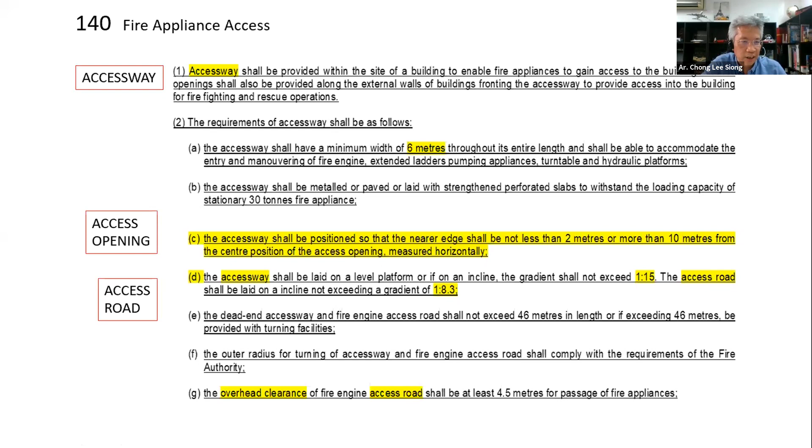So here, what we see is that in just this one new clause, we've got the definition of an access way, we've got the definition of an access road, and we've got the prescription of an access opening. It doesn't actually prescribe how you locate access openings, but it's given now the relationship between the accessway and the building, i.e., you require an access opening.

Yeah, what this clause actually says, the start over here, fronting the accessway, provided with the access opening shall be provided along external walls of the building fronting the accessway.

What this really means is that if you're designing a building with a fully fire rated wall on one side, say on one of the elevations, without any access openings whatsoever, it's a full fire rated wall, a solid wall, where there's no risk of fire burning out onto the exterior, and there's no way for people to even get inside. You don't actually need an accessway fronting that particular part of the building. This is really what it means, because it is meaningless to have an accessway fronting a blank wall.

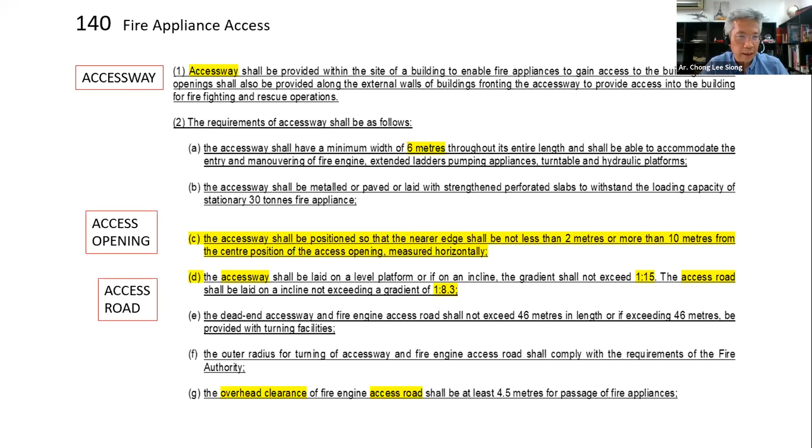Right, now we look at the other prescription then. Firefighting measures to fight fires for buildings over 18 meters high. Buildings in which the topmost floor is more than 18 meters above fire appliance access level shall be provided with the means of gaining access and firefighting from within the building, consisting of firefighting access lobbies, firefighting staircase, fire lifts, dry and wet rising systems.

Okay, we are all very familiar with this. This is really talking about the provision of firefighting access lobbies, FFAL, for buildings where you have floors higher than 18 meters from fire appliance access level. So this one, the reference is to building height. The prescription for fire access way is based on building volume.

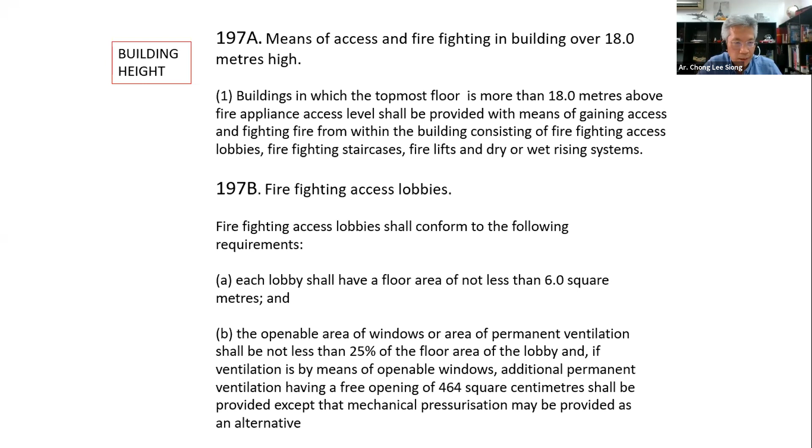The prescription for the FFAL is based on building height. Now, both of these prescriptions are totally independent of the purpose group of the building. It doesn't matter what building you're building. The provision of fire appliance access and the provision of FFAL is just reference to the volume of your building and the height of your building. That's a very important note over here.

Right, okay, let's look at the fire appliance access now. Remember, we've got the definition of an access way. These are my own definitions now, not the definitions from the UBBL itself. So an access way is really an area for the entry, maneuvering, and parking of fire appliances during firefighting and rescue operations. An access road is a road capable of accommodating the passage of fire appliances to enter an access way.

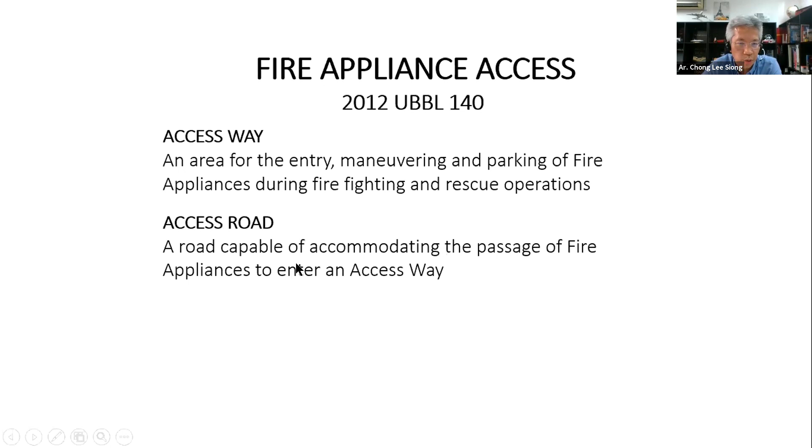And access openings are doorways or openings that allow fast and safe entry of firefighting and rescue personnel into the building during firefighting and rescue operations. Now, all three of these items will have to work hand in hand in our design for the purposes of designing for firefighting from the outside of the building and from within the building.

I'll take it as a bit of a parallel. If you consider when you're designing, say, a car park. If you're designing a car park, the access way would be the equivalent of where you have your car parking bays, including the frontage to the car parking bay for you to maneuver your car into the car parking bay. I will take that as the equivalent of a car park arrangement.

The access road, on the other hand, are like the ramps, the main ramps entering into the car park, to the point where you can enter a particular car parking floor and then enter into the circulation of the car parking floor where you're going to eventually park your car.

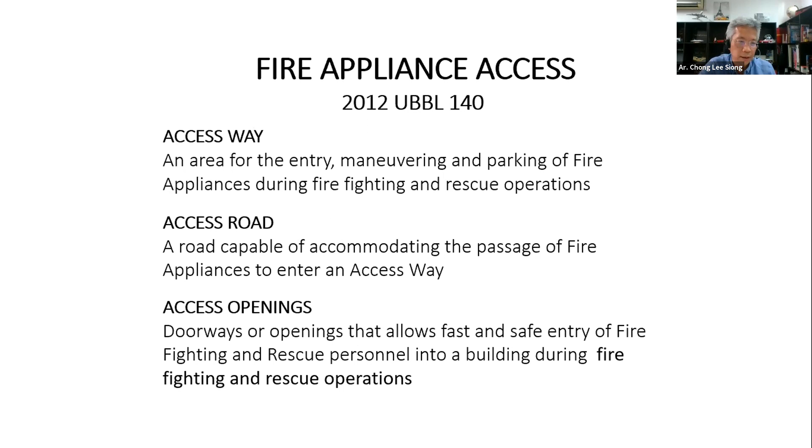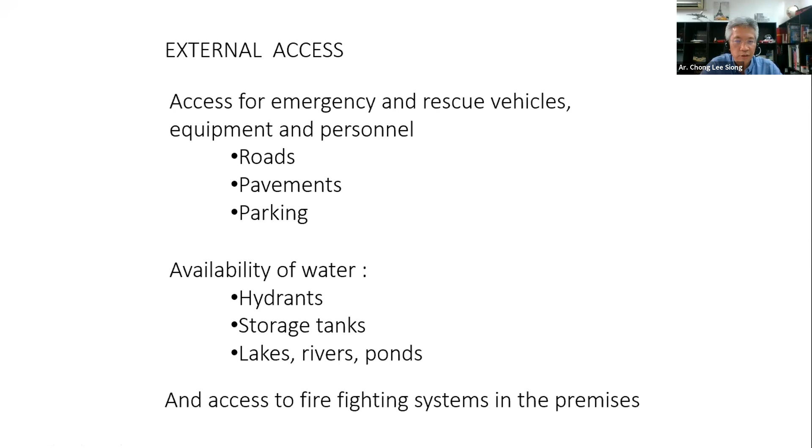On the external access, when we talk about Bomba access, we're really talking about Bomba and any other rescue personnel - access for emergency and rescue vehicles, equipment and personnel. So it'll consist of roads, pavements, parking, and the availability of water - hydrants, storage tanks, lakes, rivers, ponds, and access to firefighting systems within the premise. That's fighting fire from the inside.

So when you arrive at the premise itself, there should be clarity of the type of building and function, the configuration of the building, clear visual signs or indications as to the configuration of the building. Where's your main entrance? Where are the access openings, etc.?

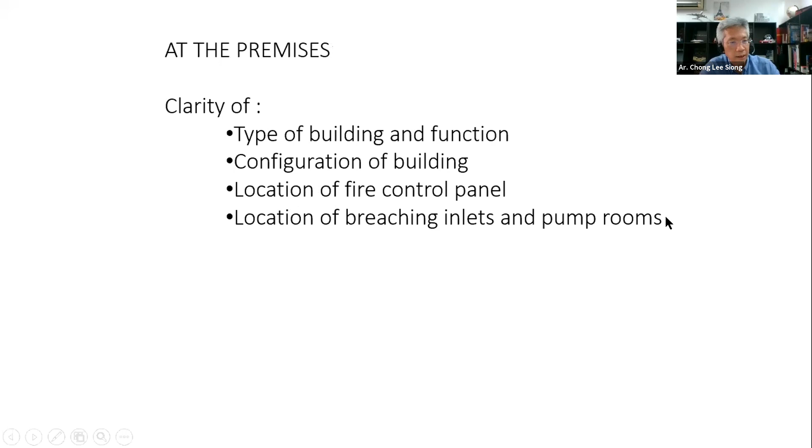Location of fire control panels - where's the guardhouse, where's the main fire control room? Location of breaching inlets and pump rooms. Where are these things? Are they clearly marked? Are they visible? Are they accessible? And access into the building via...

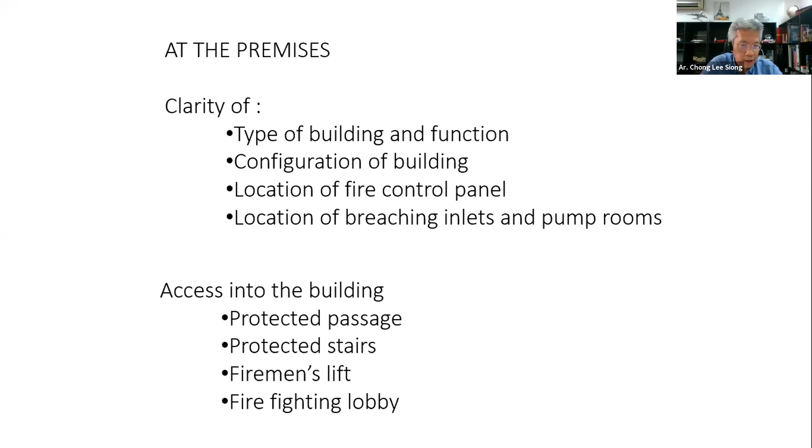Protected passages, protected stairs, fireman's lift, and firefighting access lobbies.

All right, just very quickly recap what are all the systems that would possibly be specified under the 10th schedule for the purposes of active firefighting installations. On the outside, where specified, you have a pressurized hydrant system, and then the pressurized hydrant system will have its own storage tank. You'll require the pumps, and then you'll require the breaching inlets.

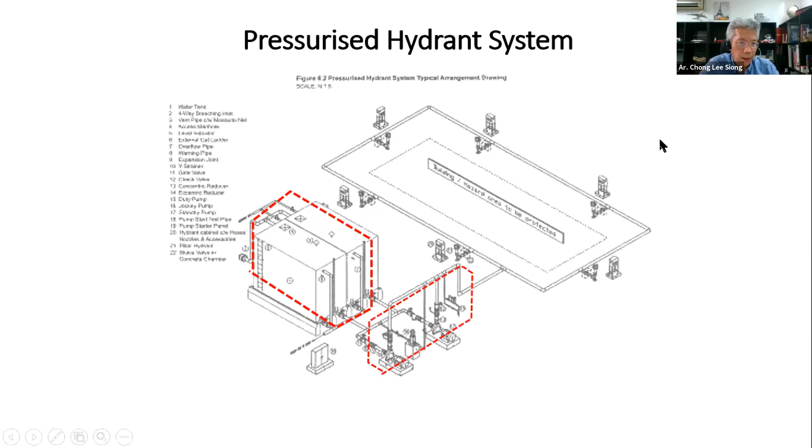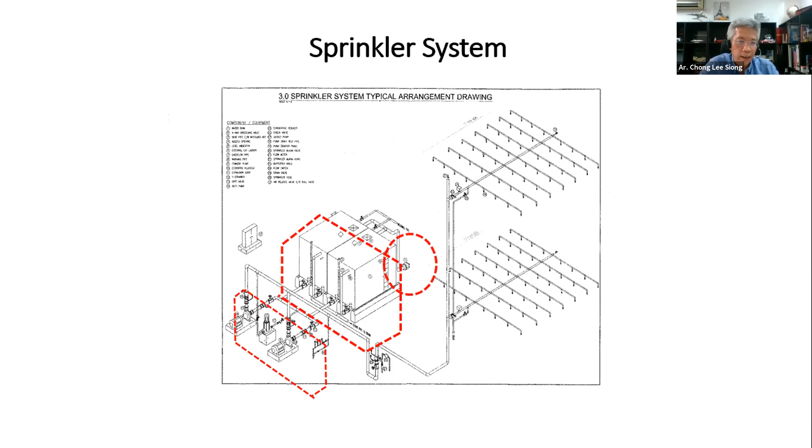Sprinkler systems are a very typical installation. You have the sprinklers, and you'll have these storage tanks, these fire pumps, and breaching inlets. Dry riser system - dry because it doesn't have any storage tanks, and if there are no storage tanks, there are no pumps either. But you do need the breaching inlet to be able to pump water externally into the riser system if it's dry.

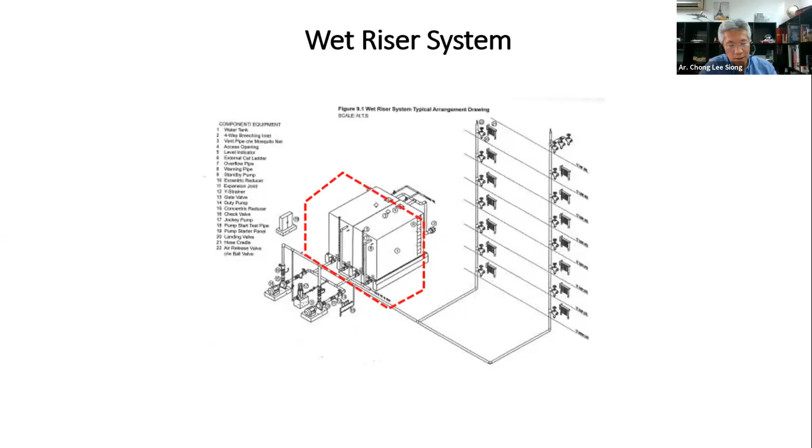Of course, if it's specified as a wet riser system for buildings above 30 meters, you must have a wet riser system - you cannot rely on the dry riser. Then you'll have its tanks, you'll have its pumps, and you also need the breaching inlets.

Okay, hose reels will not have breaching inlets. Hose reels are first aid, so they'll have their tanks, they'll have their pumps, but they will not have a breaching inlet. In other words, hose reel is really meant to be used by the occupants of the building - you and me, we can use the hose reels as first aid to fight the fire. If the water actually runs out, you better leave the building by then, because the firemen will be coming in, and they will take over and use the risers.

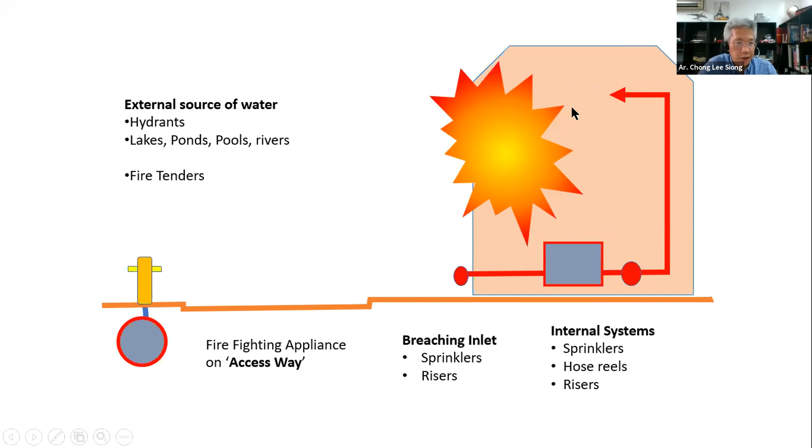So when they arrive, this is really their playground, the access way. The access way is really like a parking garage that you create solely for the use of the firemen. When they arrive, they would be where the fire engine parks. These are called the staging areas, where the fire engine parks for that sole reason.

But the fire engine is actually a water pump. What makes a fire engine is the water pump. Of course it carries a lot of other equipment, but primarily a fire engine means it's carrying a very large capacity water pump. The whole intention is that you'll be able to connect the external source of water into the fire engine, and from there use the pumps to fight the fire from the outside.

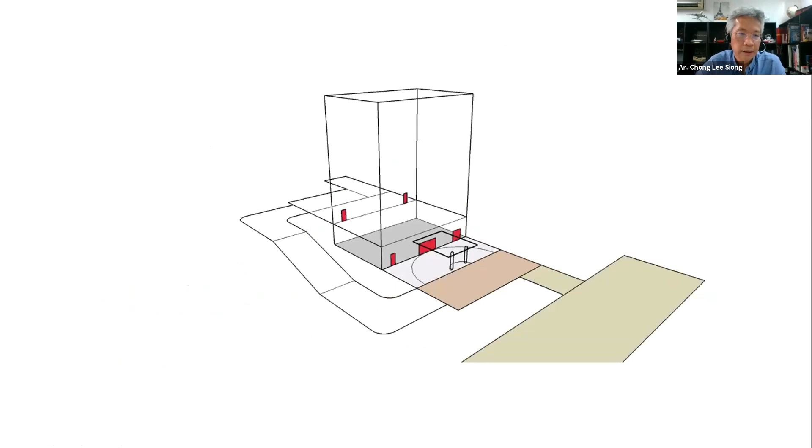Now, in terms of the design, where the prescription of the bylaw is this: we are still working by volume. So you've got the volume of the building, and from there you determine the proportion of the perimeter of the building where you would require a frontage to the accessway. Using this example, let's assume the volume works out that you need a quarter frontage to an accessway. So this becomes the face of the building that would be required to front an accessway, and you have to design an accessway to front that required face of the building.

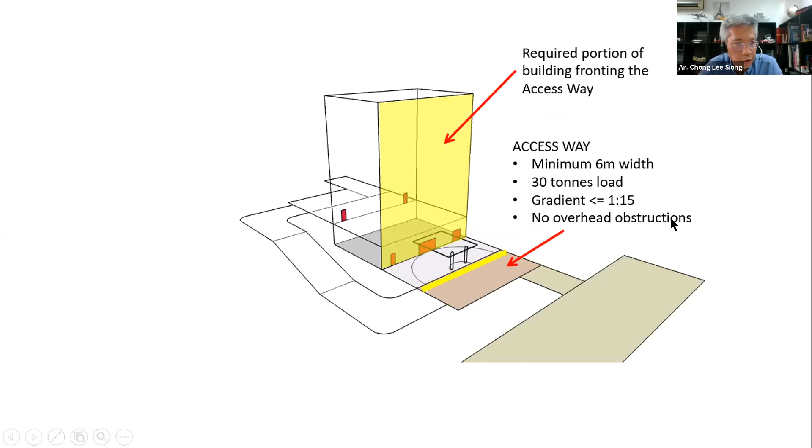So the accessway minimum - I have to emphasize, minimum, it may be more, you may need a lot more - but minimum, you start off from 6 meters. The prescriptive load in terms of how you design the driveway: gradient not steeper than 1 in 15, and zero overhead obstructions. Absolute zero overhead obstructions.

Access road from the circulation for Bomba to be able to bring them into this access way, minimum width I'm suggesting 4.5 meters. This is not prescribed in the UBBL, but Bomba has been issuing guidelines with regards to the design of access roads into gated buildings and gated communities. The guidelines dictate that if you have to get Bomba to pass through an archway or gateway, the minimum unobstructed width shall be 4.5 meters, and the minimum overhead clearance, specified in the bylaw, shall also be minimum 4.5 meters. So you need minimum 4.5 meters width and 4.5 meters clearance for an archway, and the gradient as specified in the bylaw shall not exceed 1 to 8.3.

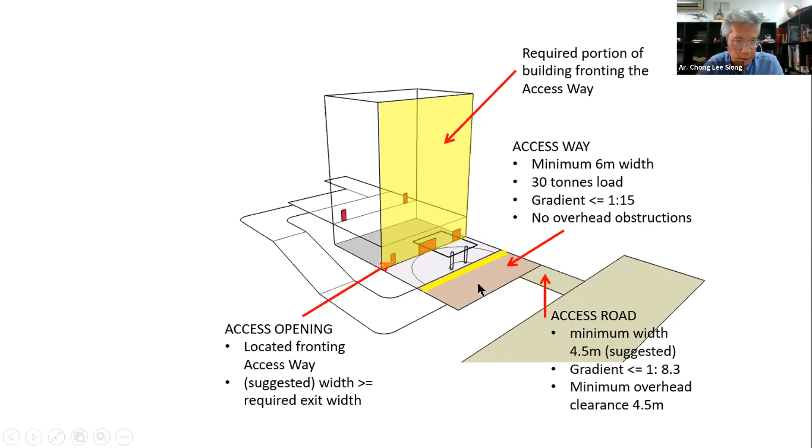So that would be the relationship. Very importantly, on the face designated for fire appliance access, you must then locate access openings. How do you locate the access opening? We'll go into that a little later. Now, the edge of the accessway - this will be the width of the accessway.

The edge of the accessway will have to be minimum 2 meters away from the face of the building, but not more than 10 meters away. So the edge you demarcate shall have to be anywhere between 2 meters to a maximum of 10 meters from the edge of the building.

Now consider another scenario: a building requiring 50% of the perimeter for an accessway, designed on a slope with two different levels of fire appliance access. You have a fire appliance access level here at the lower ground, and behind, another frontage for an accessway at a higher ground. You basically have to repeat all these requirements across the other face of the building, then find ways to get access to that part of the building.

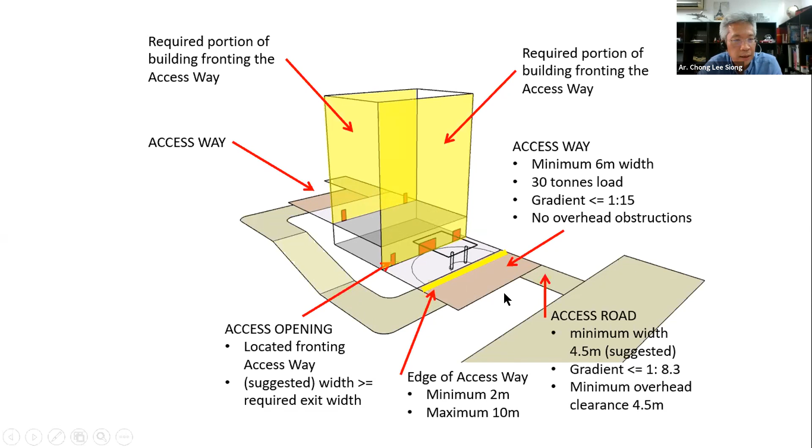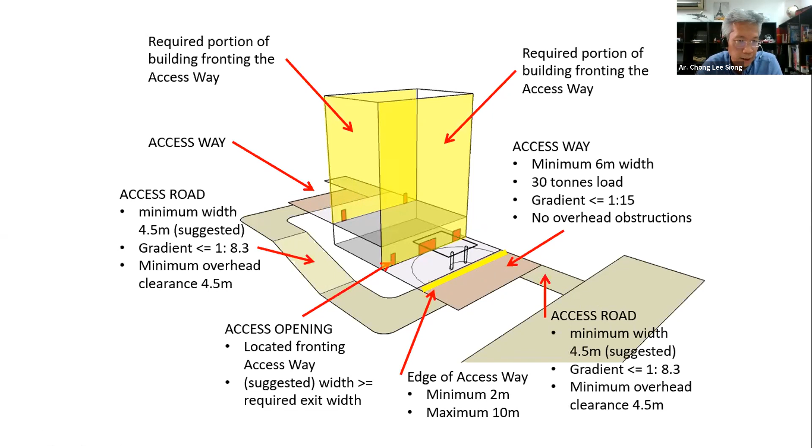This connection is not specified in the bylaw. It doesn't actually say you must connect the two accessways, but this is always a recommendation for the practicalities of how Bomba will fight the fire and maneuver across the site. Where possible, I'd suggest you look for ways to connect the two accessways at the two different levels, coming in from two different access roads. Seriously consider connecting these two accessway platforms via an access road, remembering the gradient is limited to 1 in 8.3, and observing overhead clearances and minimum width required between obstacles, gate posts, or curbs.

Looking into further detail, when Bomba actually comes to the access way, this designated access way will have to be labeled with huge letterings painted on the floor, saying 'Laluan Jentera Bomba, Kosongkan Laluan.' This is all mandated.

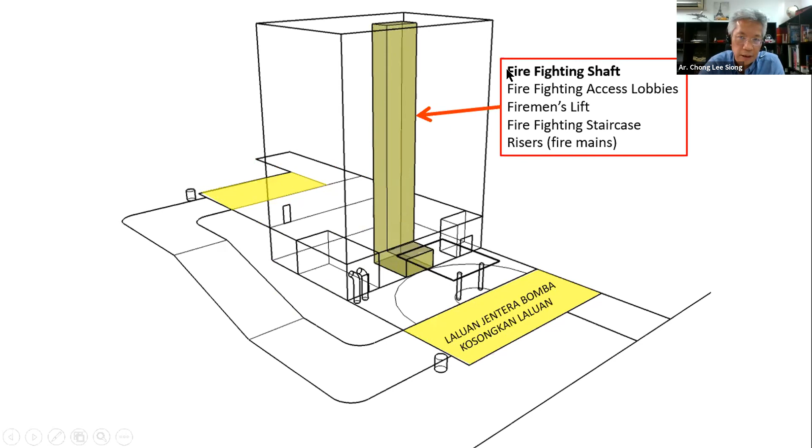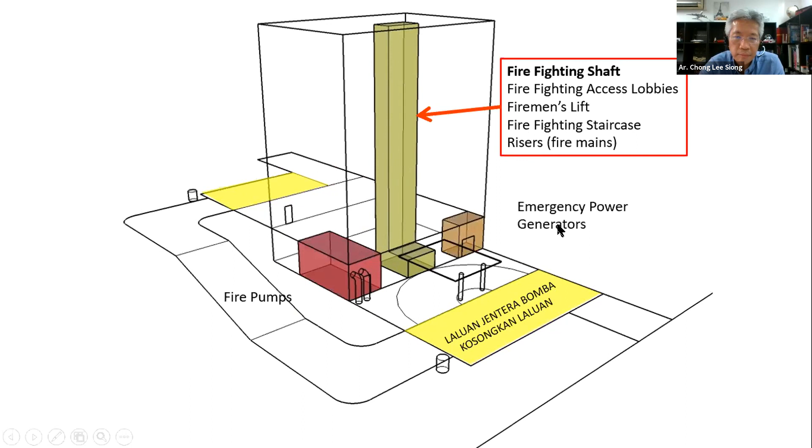From there, this is the relationship to fighting fire from the inside. You have the firefighting shaft, and you need the location of the pumps to be accessible from the access way, along with emergency power generators, the location of the physical breaching inlets, and the location of the hydrants, which are spaced 90 meters along the access ways.

But more important is that the nearest hydrant to the breaching inlet—wherever you locate the breaching inlet, you must have a hydrant within 30 meters, absolutely no more, in the manner you can lay the hose from breaching inlet to hydrant. The precise measurement is from the coupling of the breaching inlet physically to the coupling of the hydrant. It cannot be more than 30 meters. That is very, very important.

Then you have the location of the access opening. In this case it's very convenient: you have the fire appliance access, and the FFAL, or firefighting shaft, comes through a lobby or protected passage. That would be an access opening the fireman would want, and it must front the fire appliance access way. The horizontal, tangential distance from the access opening to the edge of the fire appliance access way shall not be less than 2 meters and shall not be more than 10 meters. That is very, very important.

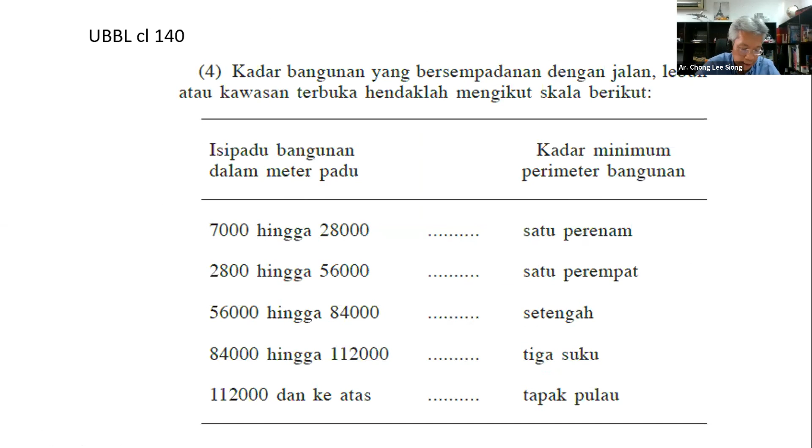Now if you look at the UBBL, we're all familiar with this chart. By volume, for all building types, these are the prescriptions of how much perimeter frontage of the building you will require to front an access way. So this is by building volume. Now let's look at a few scenarios as to how it's applied.

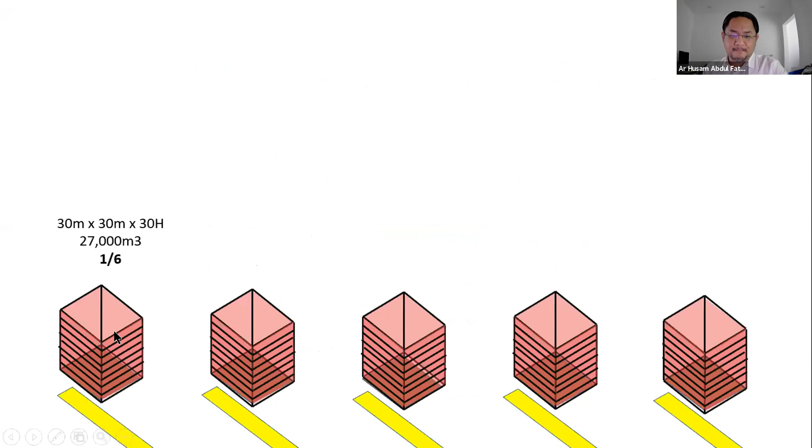Looking at a high rise, let's say there's a plinth of 30 meters by 30 meters—about 100 feet by 100 feet—a very small plinth, less than 1,000 square meters of floor plate. It's a small plinth building but goes up very high. So when it goes up to say 30 meters, by this volume of 27,000 cubic meters, the bylaw will prescribe a frontage of 1 over 6 of the perimeter frontage.

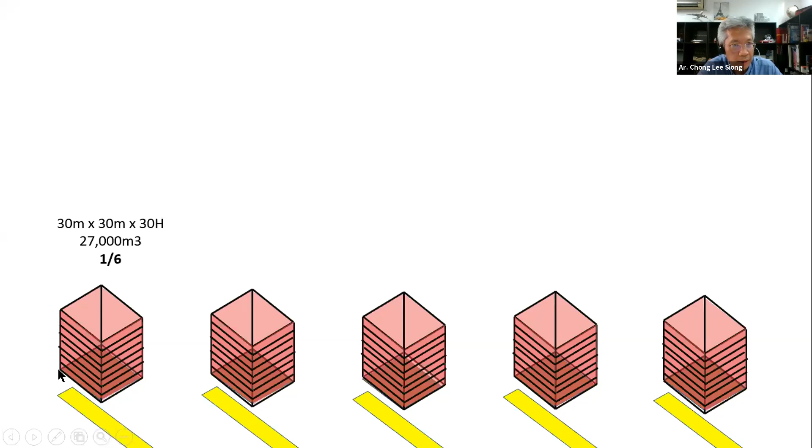So this is the frontage, approximately 1/6 of the full perimeter. If I increase the building height, doubling the building volume to 54,000 cubic meters, I will require a quarter of the perimeter as frontage. So I got this frontage, which is a quarter of the perimeter.

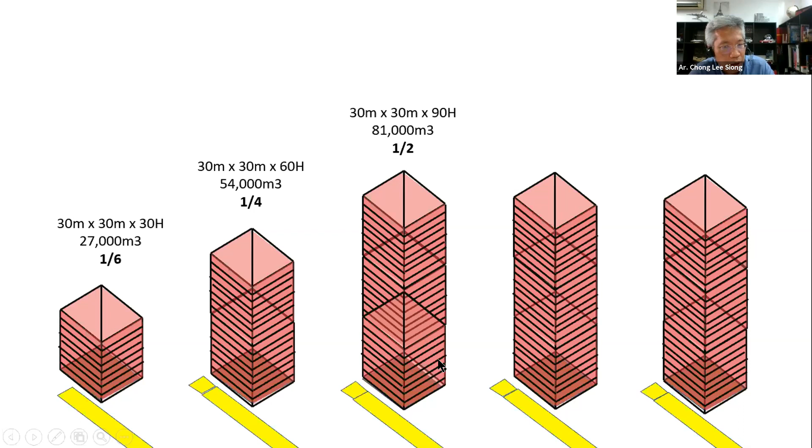If I increase the building height to 90 meters, on the same plan, I would then have 81,000 cubic meters. And 81,000 cubic meters would then require half of the perimeter to have a fire appliance frontage. So that's the half of the frontage that I'll require. And so on and so forth.

If I go a bit higher, to 108,000 cubic meters, that would be quite a tall building now, 120 meters high, I will require 3/4. So there you go, I have that 3/4.

If I go even higher than that, a super tall building now, 150 meters high, 135,000 cubic meters, that will be an island site. So there you go, we have an island site.

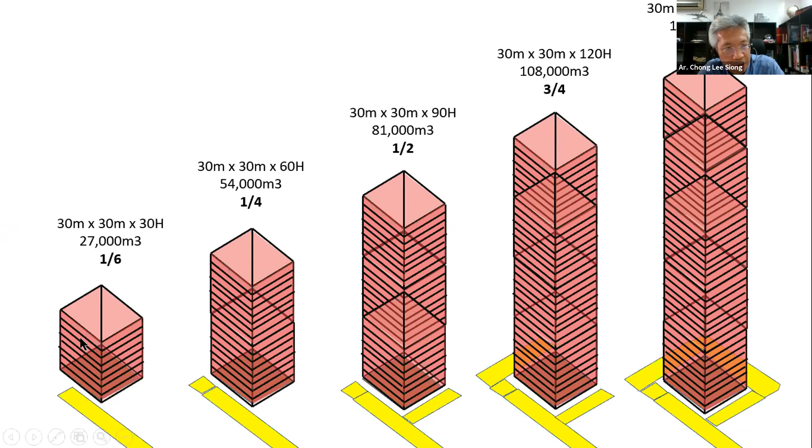Now, if you look at this situation, this is the prescription on the application of the fire appliance access way relevant to the volume of the building, applied in terms of a proportion to the face of the building.

Now, if I have a fire burning inside the building at a high level on that side, and the fire is actually leaping out of the window openings on that side of the building. If you come to this building, you have this perimeter access limited to just that part, and firemen have got no way to go to the other side. What would the firemen be doing?

Remember, this is a 30-meter high building, so obviously there will be firefighting shafts already installed, and wet risers already installed. So the purpose of this access way would really be just to bring the firemen here so they're able to hook up the hydrants to the fire engines, to the breaching inlet. Hopefully your breaching inlet will have already been installed somewhere within 30 meters of the nearest hydrant for them to hook up.

Then the firemen will have to enter your building somehow, through an access opening, to reach the firefighting shaft, take the lift up to the relevant floors, and be able to fight the fire from the inside.

Now, this building has got exactly the same plinth. If this building is that much taller, and a fire happens over there, what would the firemen be doing? They would be doing exactly the same thing as they would with this building. In other words, they need to be able to enter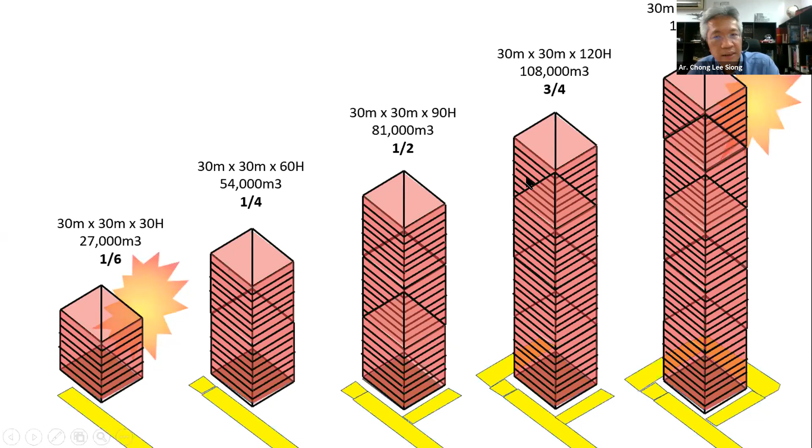In fact, because this is a lower building, if a fire occurs at the lower floor, I would actually prefer the appliance accessway to be an island on this building instead of on this one. Because this one is such a tall building, I would have had a full criteria of design for firefighting from the inside of this building. There's no point fighting the fire from the outside if the fire is burning at that level.

So I would say that if the building is designed in exactly the same manner, for this building the 1/6 fire appliance frontage is probably too low, right, and that would be my suggestion. But of course, if you do this, you're not breaking the law. You're still in full compliance of the law.

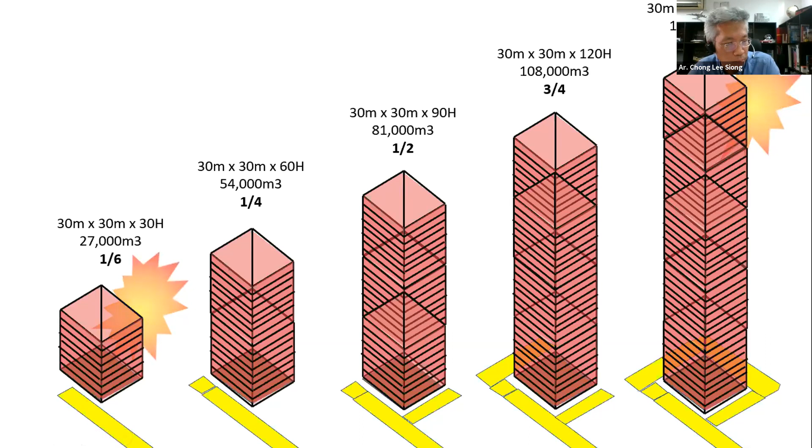Let's look at another scenario, a low-rise building. This building plinth over here has the exact same volume, 27,000 cubic meters, 1/6 of the frontage. This building is much lower, but it's got 3 times the floor plate, and it's also long and rectangular, 27,000 cubic meters, exactly the same volume as that building.

It still requires 1/6, and this 1/6 is a little bit longer because it's 1/6 of a longer perimeter measurement, right? So you have this situation when it comes to this building.

54,000 cubic meters, 1/4. So if I put the same volume on this building, that's 54,000 cubic meters, and I require 1/4, and that would be my 1/4.

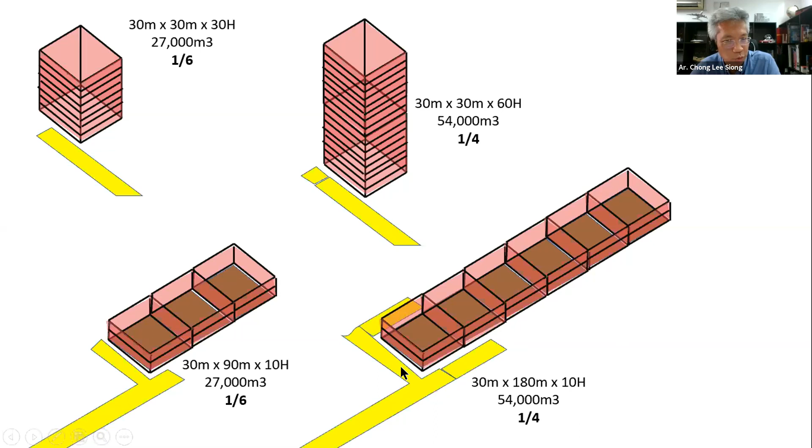That will comply because it's 1/4. So if a fire burns on this end of this building, I've got access via the access opening vertically up the fire shafts, firefighting access lobbies, to fight the fire on the upper floors. But if I have this low building, which is only 2 floors high, I don't have internal firefighting lobbies.

I'm still complying with the prescription of the bylaw by having only 1/4 perimeter access, which is over here. So the firemen, when they arrive at the building, have to find a way to enter the building, find a way to go all the way to the end, and try to fight the fire from here.

And the possibility is that with a building of this volume, depending on this purpose group, it probably only has hose reels inside, and the hydrants will be located along over here. If you locate a hydrant over here to comply with the 90 meter rule, and you don't provide fire appliance access to the hydrant, then it becomes useless.

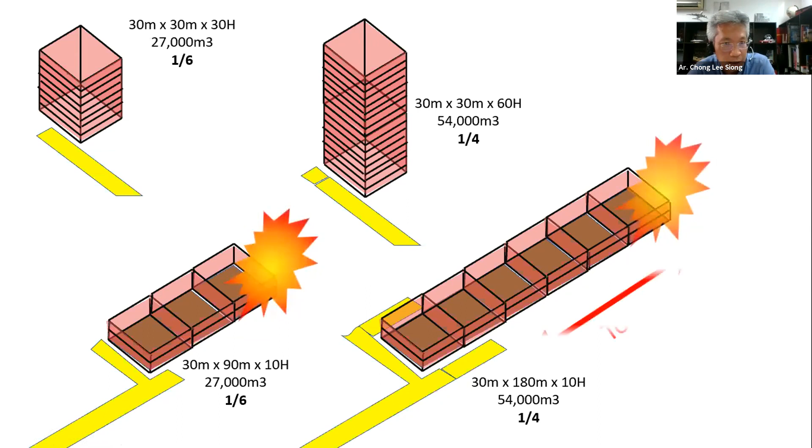So what I'm really saying is this: basic compliance with the bylaw, without thought on how the fireman fights the fire, would not exactly be the best way to approach the design of a building, right? Because that would be too far for the fireman to reach. So minimum prescriptive compliance does not necessarily mean you're complying with the required performance.

So of course, Bomba is definitely very well versed in this. Very often when we submit plans, there'll be a lot of conflict when we go for minimum compliance, and Bomba will say, oh no, you need to do this, you need to do that, you have to add this and that. Then a lot of times we end up arguing with Bomba, saying, but the bylaw only asks for this, why are you asking for more?

Right now, this is the precise situation where something like this can actually occur. This is hypothetical, of course, but it can happen. You would think you've complied with the minimum requirements of the bylaw, but that minimum compliance does not fulfill the performance criteria.

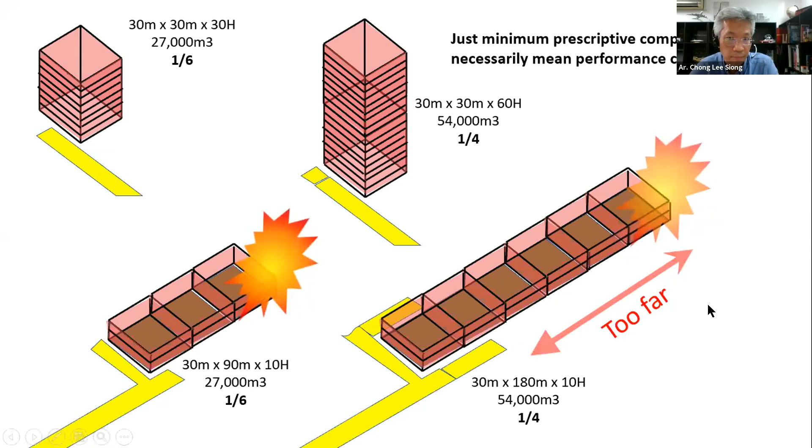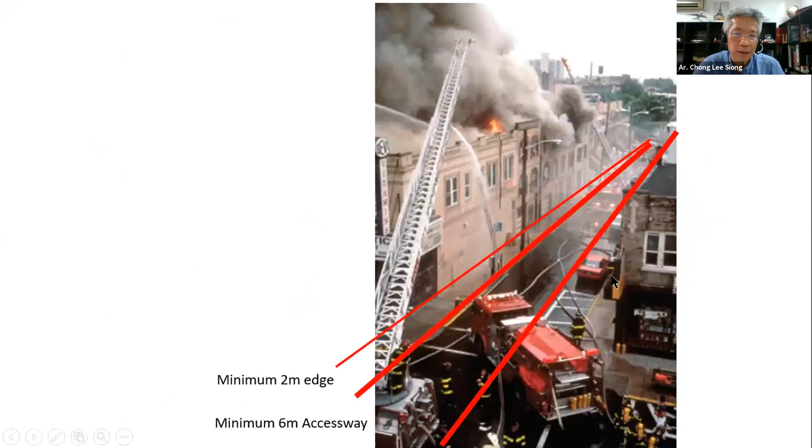So if you look at a picture like this, a fireman typically fighting fire - if you just go minimum compliant, minimum 2 meters, minimum 6 meter access way, are we still designing to minimum prescriptions? That's the key thing.

Fighting fire from the outside, you look at the kind of space they have to park in. On the contrary, the lower the building, the more width they would actually require, because they would have to park the vehicle in a manner to be able to reach that. A higher building, on the contrary, actually requires a little bit less width.

But they will always require multiple fire appliances to be able to connect the hoses from one pump to another, and depending on the capacity, they might need to start connecting the pumps in series to boost up the pressure as required. This is a general configuration on how they park the fire appliance access.

Now, I want to bring you to the Singapore codes. I'm not saying we are adopting the Singapore codes, but recognizing what Singapore is doing gives us a very good idea on what we should be designing. Don't just comply with the minimum bylaws - by understanding these things, we should be able to design it in a better manner.

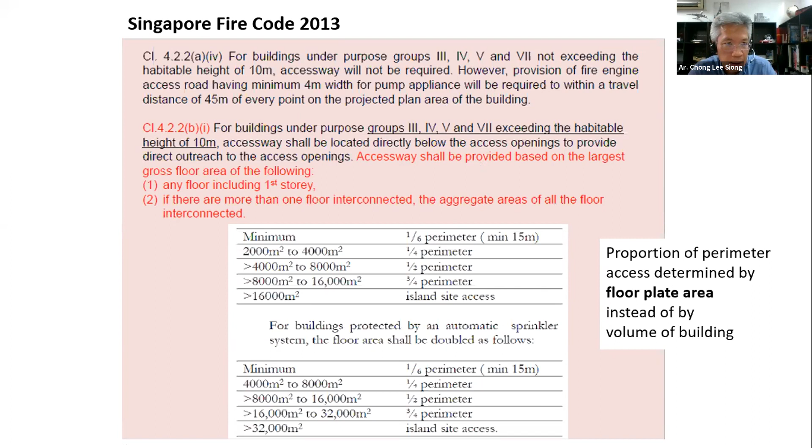Now, it is in no way contradicting the bylaws. But it is a way to check and ensure that you are designing it to be appropriate.

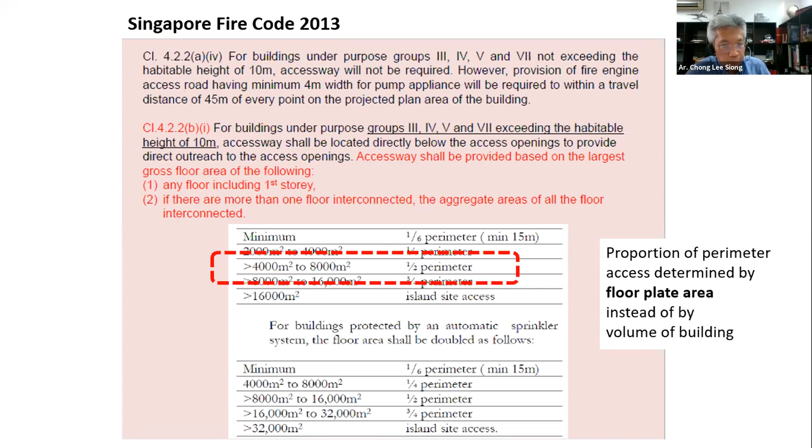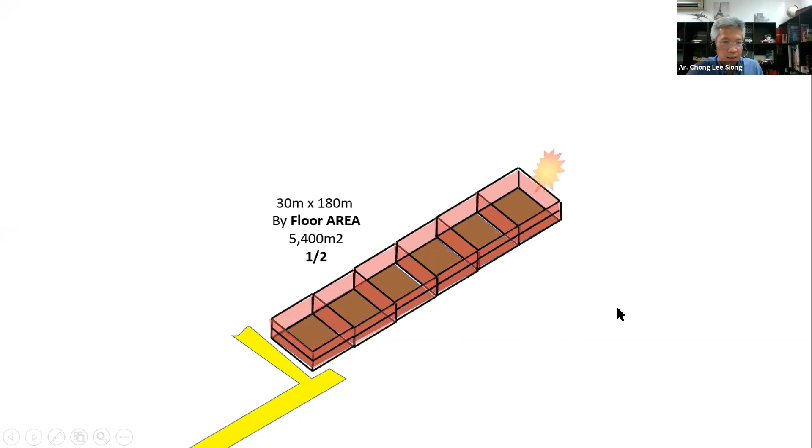Let's take an example. Our previous example had a volume calculation requiring, what is it, 54,000 cubic meters, and we end up seeing that our fire appliance access way may be limited to only this corner. If you use the Singapore code using floor area, this floor area has got 5,400 square meters, and the Singapore code will then require half of the perimeter of the building to be serviced by the access road. You see, this is the main difference.

So applying a performance criterion to check on your prescriptive codes can often lead to better designs.

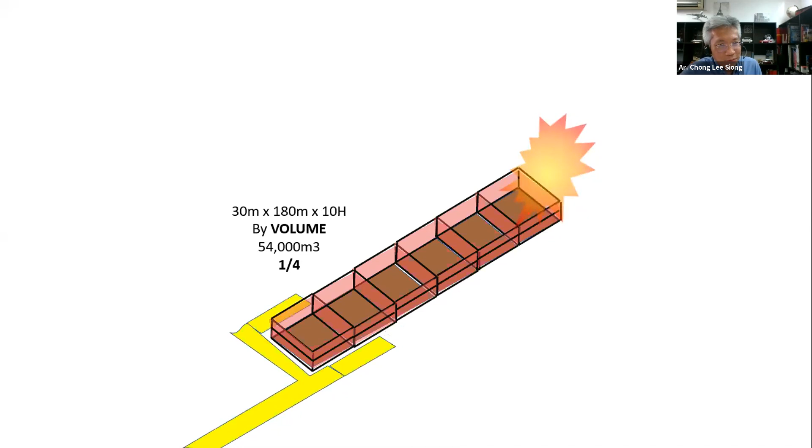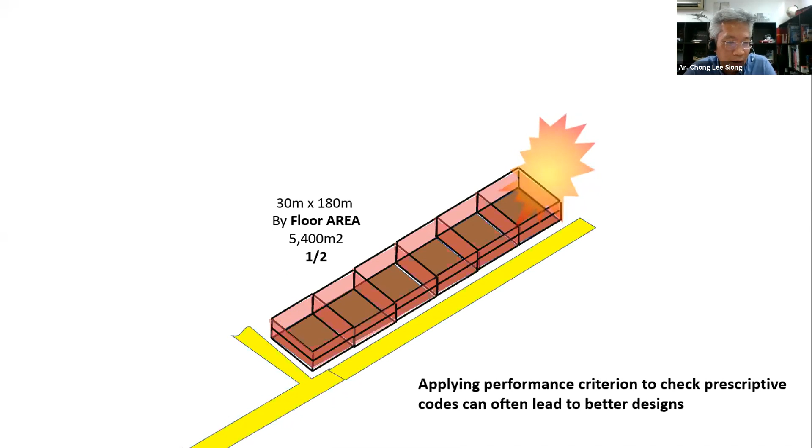If you walk into Bomba with a building designed like this, and they spot it, they'll say, 'Hey, this is not allowed, we need to extend it.' But if you go to Bomba and say, 'UBBL asked for this, but look here, I checked the Singapore codes and I'm giving you this,' you'll get your approval immediately. Because Bomba will then recognize that you have designed your building not just to minimum compliance, but have actually considered the physical requirements of firefighting, what Bomba requires, for your building to be safe.

All right, so I'll quickly run through now on firefighting from the inside. Give me 10 minutes, then I'll open it up for question and answer.

So that's on the outside now, which is just defining the frontage to an access way. Now, what's more important is when you get inside the building. What you design on the outside is the access way, hydrants, location of your breaching inlets, and the access openings. That is what you have to handle from the outside.

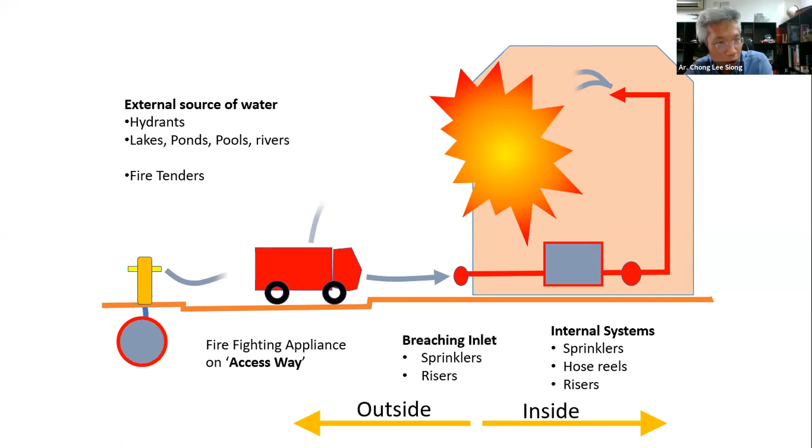On the inside is then the firefighting lobbies. If you have a small residential house like this, where are the firefighting lobbies? We don't even have fire extinguishers inside our house. So what about fighting fire on the inside? There's nothing with regards to designing for firefighting from the inside if you just have one single house. Why? Because it's such a small house.

The occupants should be able to escape out of the building already. When the firemen come, their primary job is probably not to save your building, but to ensure that your fire does not leap to the neighbors. You'll notice that when firemen come, they will not exactly be saving your building first. If occupants are trapped in there, they will want to save the occupants. But if there are no more occupants trapped inside, they're not worried about putting out the fire in your building. They will be splashing water, spraying water, and cooling down the buildings on both sides to ensure the party walls are holding up and the fire will not leap to the adjacent building. Your building can burn down for all they care.

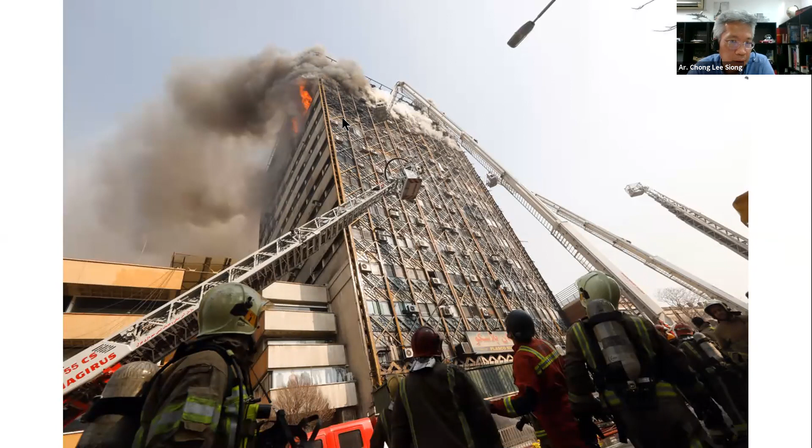Likewise, these things here are not of any help. This boom over here is, again, just to cool the building. In this configuration, the building is so tall that there's no appliance access on this face of the building. Does it matter? In my opinion, it doesn't matter, because there's no reason for you to want to reach there anyway. The fire will be fought from the inside already in a situation like this.

So the Singapore Code has a clearer definition on how you apply access openings. Our Malaysian code is absolutely silent on this.

A bit of background on this one - don't quote me on this. When we did the revisions to Clause 140, it actually had the prescriptions for access openings, because we literally took the Singapore Code, studied it, and thought we could apply it lock, stock, and barrel. But Bomba were not too confident at that time to make that prescription, so the precise prescription for access openings was taken out of the UBBL 2012.

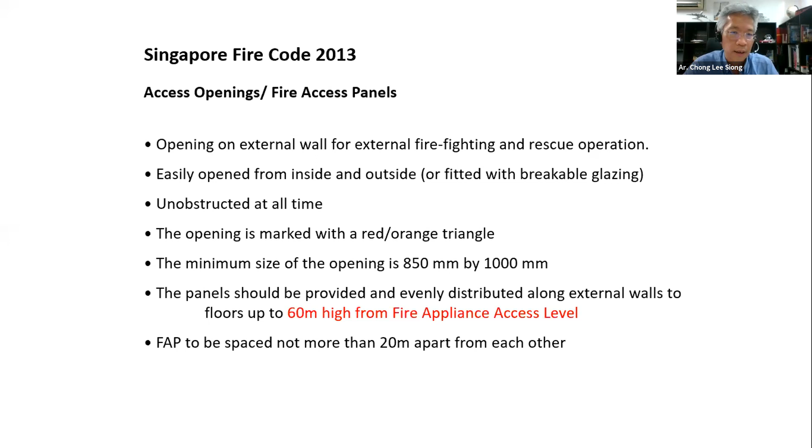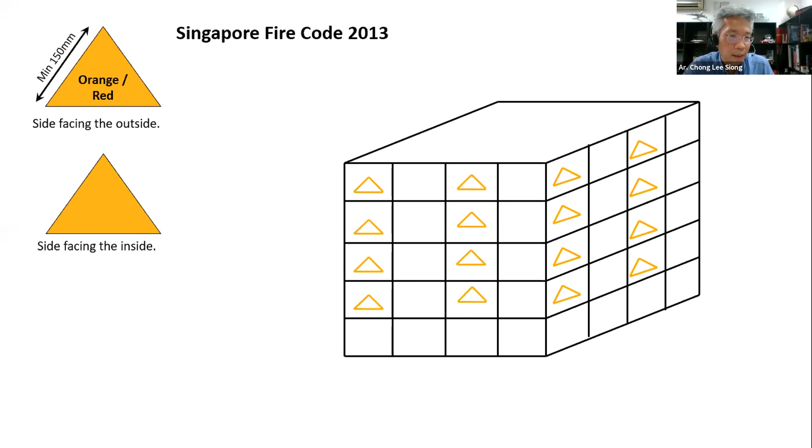But then again, just having a look at the Singapore codes will make us understand what we can do. If you've ever traveled to KLIA, you would have noticed that along the departure halls, on the perimeter glazing, every so often you'll see a glazing with a bright red triangle on it. You'll be wondering what that's for - that is actually marking the access openings. That means that piece of glass is tempered only, not laminated, so Bomba can smash it and get access into the building.

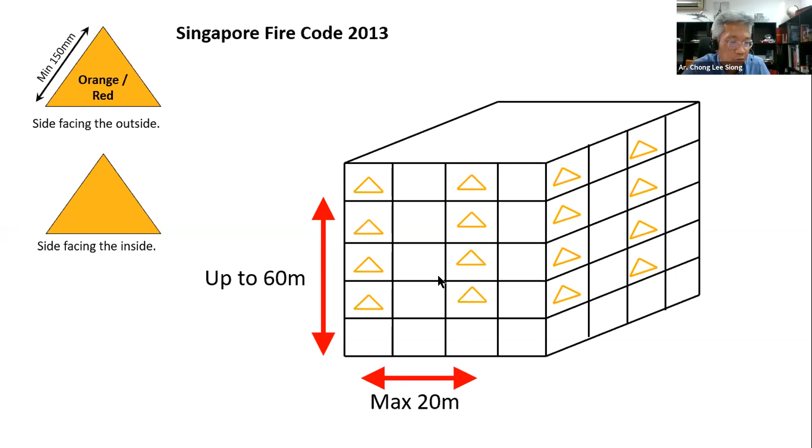The Singapore Code dictates that horizontally you have to have access openings at maximum 20-meter intervals, up to a building height of 60 meters. Anything above 60 meters, they're saying don't bother giving any access openings from the outside, because nobody can reach you anyway. So access opening is provided up to 60 meters, and horizontally at maximum 20-meter intervals on the frontage facing your fire appliance access way.

This is the application in Singapore - you can see these little triangles here. These are the access openings, and there are a lot of prescriptions on them. It has to be accessible by firemen from the outside. If you have a piece of glass, it cannot be laminated, neither can it be just float glass - it has to be tempered glass, so the fireman can smash it and get access.

If it's an opening panel, it has to be one that can swing out of the way when you open it. If it's a drop panel, something you actually remove, it has to be tethered. In other words, you don't expect the fireman to come in, remove the panel, and then throw it down onto the ground - you can't do that. If it's just a removable panel, it has to be tethered, so when you remove it you'll be hanging via the tether and it wouldn't drop down to the ground. So there are various prescriptions.

On the external part, for example, all these are from Singapore - you have external cladding or louvers and all that. So you also have to identify which panels are to be openable.

They do have very specific guidelines as to what is allowed or not. The primary thing is that it has to be able to be smashed open by Bomba—not in Singapore, it'd be the civil defense. It had to either be able to be smashed open straight away with a clear opening, or if it's something that swings open, it must swing in a manner that will not obstruct the entry. If it's something that has to be removed, it must be tethered so that it will not drop to the ground.

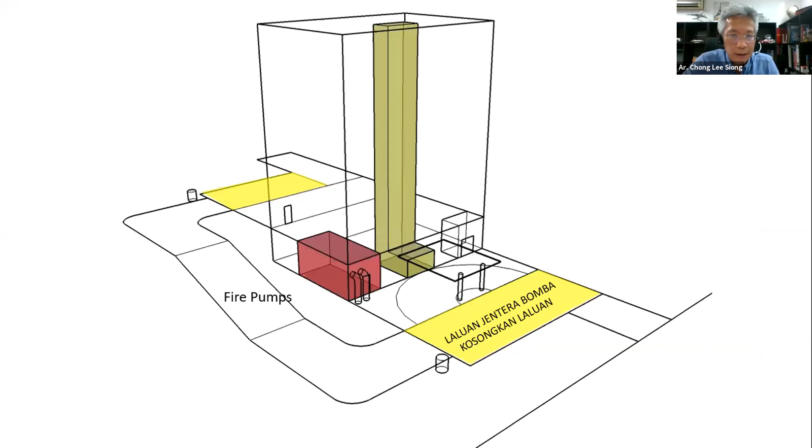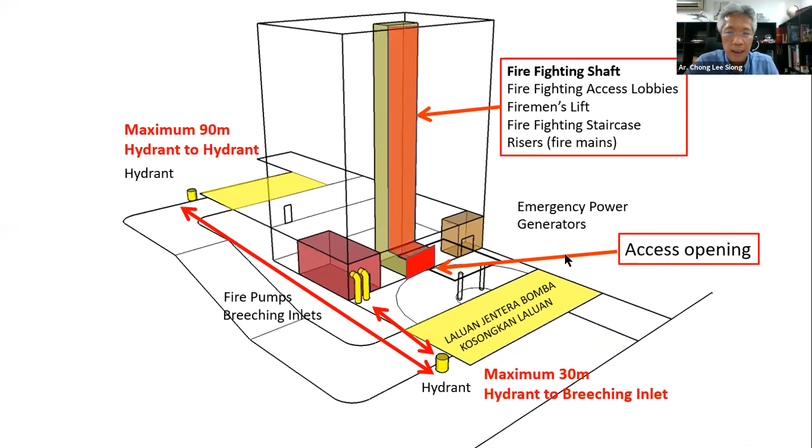Coming back to what I mentioned earlier, the key element here is the access opening relative to the fire appliance access way—the access opening leading you to a firefighting shaft or to parts of the interior of the building.

In terms of the application of the firefighting shaft, we know that if the building is above 18 meters, you need a firefighting shaft. From 18 meters to 30 meters, you can make do with just a dry riser. Above 30 meters, you must have a wet riser. Now, in most of my projects, even if I just cross 18 meters, I would usually go for a wet riser already—because if you can do it, why not?

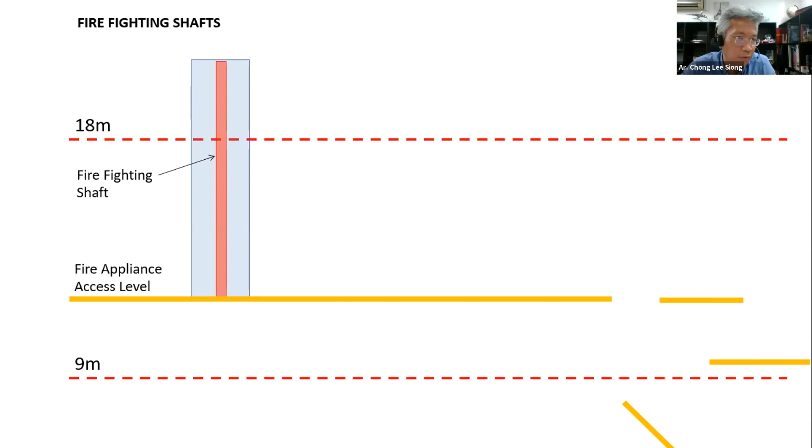If you have lower basements below the fire appliance access level, you do not need a firefighting shaft if your basement does not go deeper than 9 meters. If your basement is deeper than 9 meters, then you need a firefighting shaft. So it's a combination of building height—you need a firefighting shaft to accommodate above ground levels of more than 18 meters, and you need one to accommodate basement levels deeper than 9 meters. So you can have combinations like that, and where your building is both taller than 18 meters and deeper than 9 meters, then you need firefighting shafts.

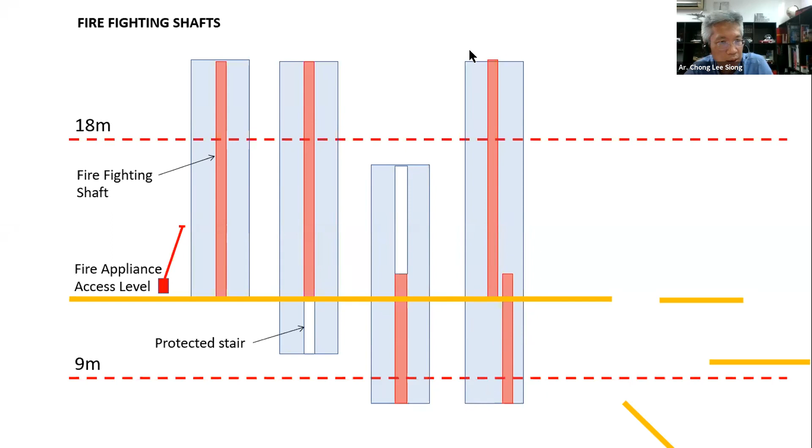The firefighting shafts will have to be separated shafts—it cannot be one single continuous volume serving the basement and the upper floors. You do have to separate it, and the physical interface will be at the fire appliance access level. If you have buildings with two different fire appliance access levels, the exposed space would have to be regarded as the basement because it's below the fire appliance access level and you've got no more fire appliance access from that side. But if you have fire appliance access levels on both sides, then it'll be one continuous shaft going all the way up, with fire appliance access at both locations.

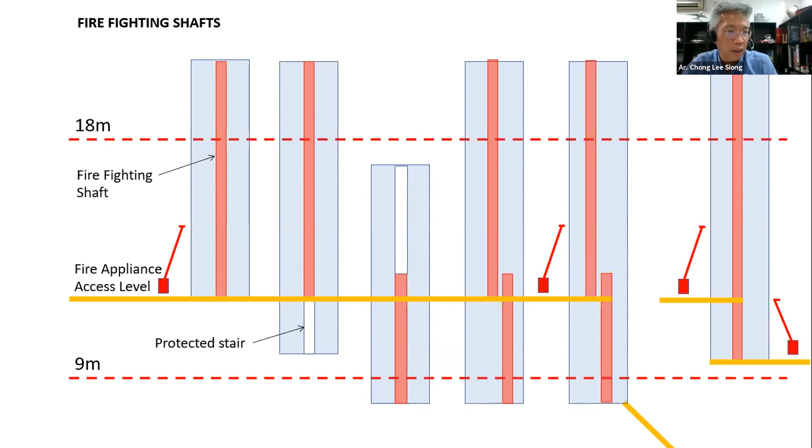These are general diagrams that you may use for reference. Of course, in terms of building design there are so many different configurations—as architects, we are so creative in how we work out the interior volumes of the building. Fantastic, by all means do so. This will just serve as a general guideline for how we design the fire appliance access levels and the firefighting shafts relative to the fire appliance access ways.

In terms of location—now, as we speak, the revised UBBL is supposed to have rationalized the prescriptions on how we locate, or what are the limits of distances for, the fireman's lift, the firefighting shaft, risers, etc. But as it stands today, the specifications or prescriptions are not exactly contradictory—in fact, they are not.

We have the law prescription from the UBBL, and we also refer to Malaysian Standard 1183. They are not contradictory at all—in fact, they're just a different way of describing the same thing. As I said, the UBBL is just a law; it just prescribes something. The Malaysian standards, as a set of standards, guide us a lot more as to the reasons we do certain things and the ways in which we do certain measurements.

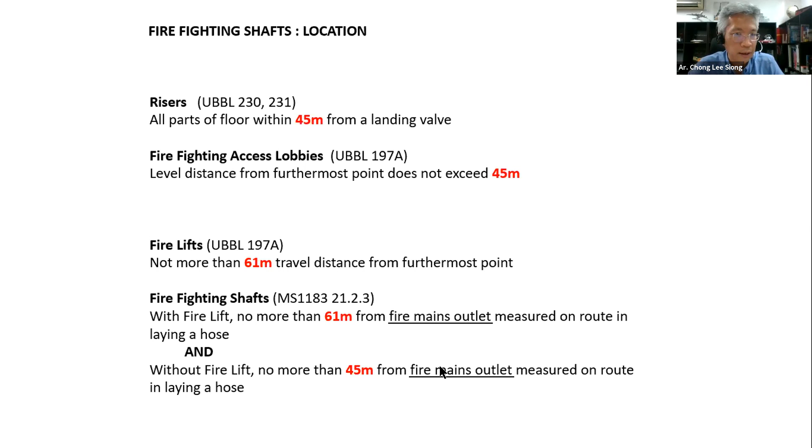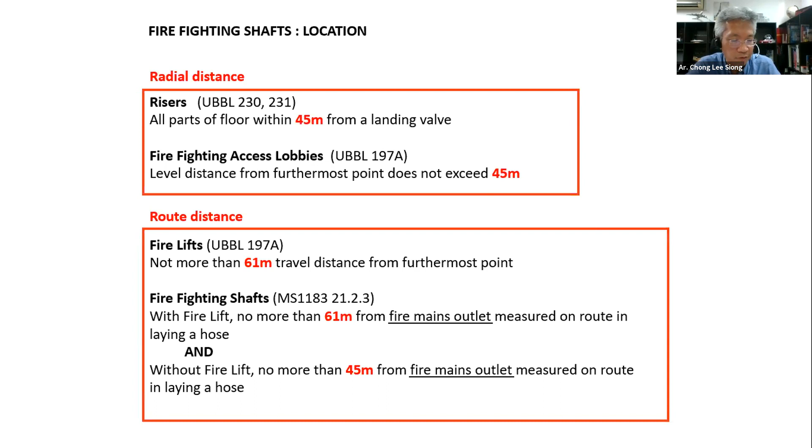Now, what we see here is that this one is referring to a radial distance. In other words, you pull a straight line as the crow flies and draw a radial circle from the point. These others here are what I call the route distance, meaning the actual travel distance—you connect a hose to that location, or mark the physical people movement around corridors, around corners of buildings, etc. So you combine both of these together.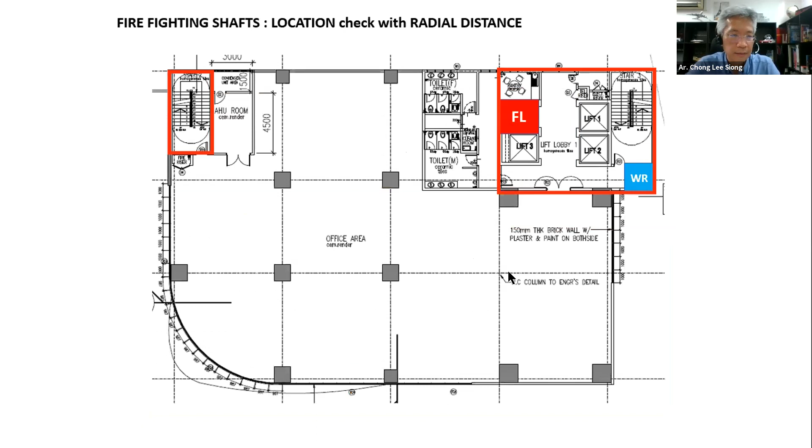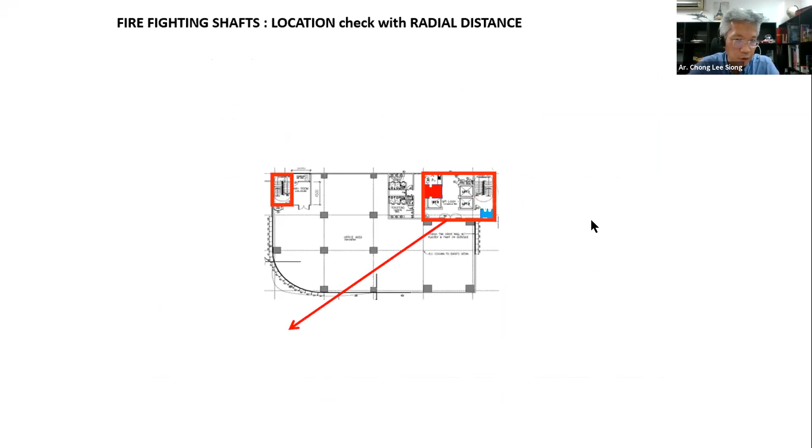Just taking an example, if you take the firefighting access lobby from the door, this will be the radial distance—this is how you check it. If you take the riser, again checking the radial distance, in this particular example I've deliberately put the riser in that location, and you find that the riser does not cover this area.

So what do you do? If you look at this plan, it's very easy—you move the riser from this corner to this corner and it would automatically cover the area. But for illustration purposes, I'm just showing this example on how we do the basic checking, so that area is not covered by this particular riser.

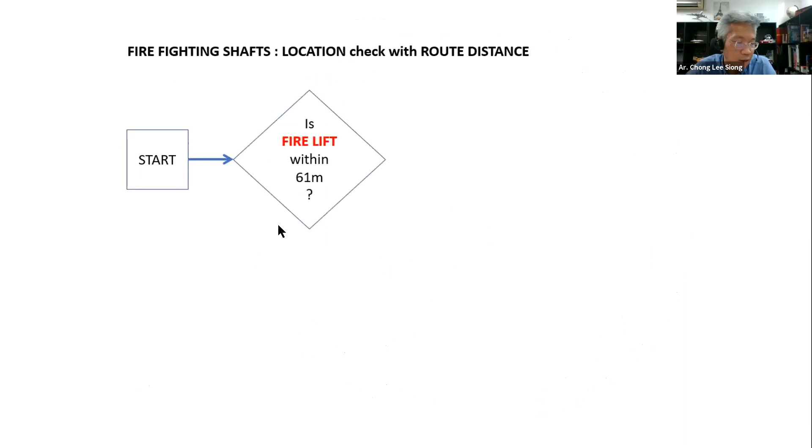Now the next thing to check is you go to a little flow chart. You start from here: is the fire lift within 61 meters? No—you immediately add a firefighting access lobby, and then ask the same question again. If the fire lift is within 61 meters, yes, then you check the fire mains. Is the fire mains within 61 meters? If the answer is no, you install the fire mains in a secondary protected stair, like in the example we just mentioned.

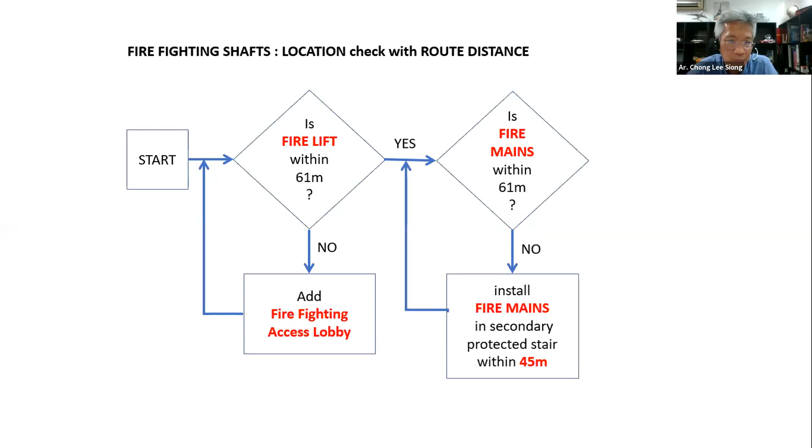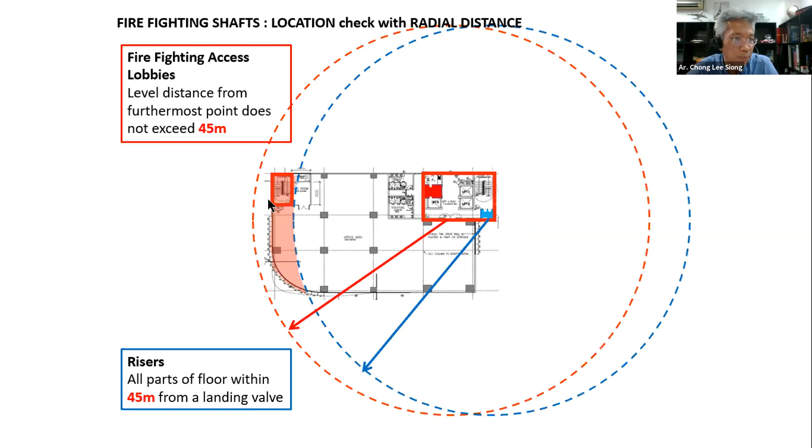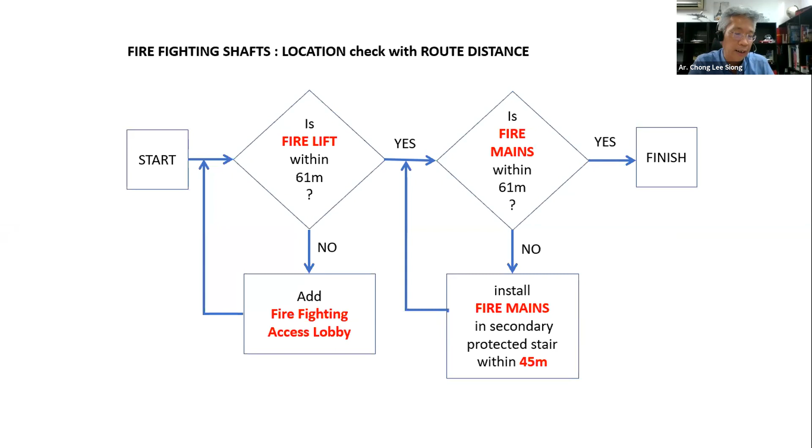In this example, if you insist that the fire mains is to be over there and it doesn't comply with the 61 meters, then you add the secondary fire riser into the protected stair—that is what's prescribed in the bylaw, so you can do that. If everything's fine, you finish. So there are actually no contradictions between the Malaysian standards and the UBBL; it's just a matter of understanding the application.

Very quickly now—I do have the last 15 minutes. I hate to interrupt, but we do need to allow some time for questions. Okay, very quickly, you'll be done.

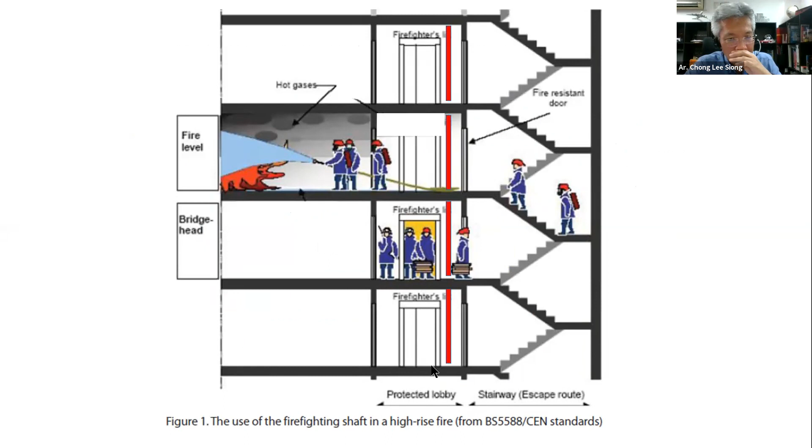Okay, firemen, when they come in here, this is how they work—I think the slide is quite self-explanatory. Very important then on firefighting on the inside for large floor plate buildings. These are all the prescriptions on the British standards.

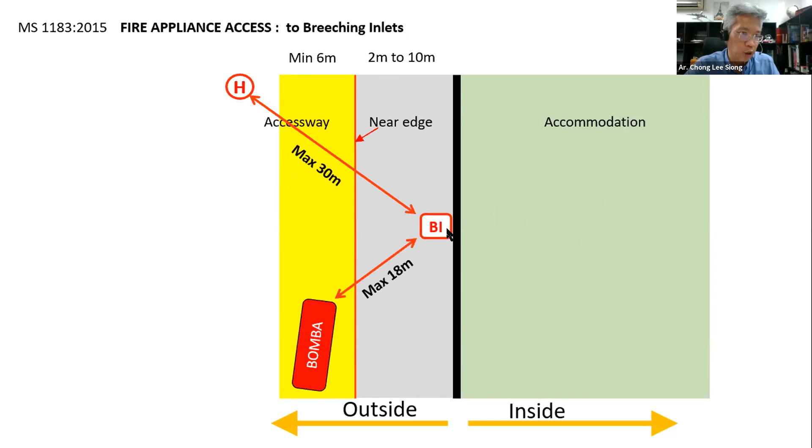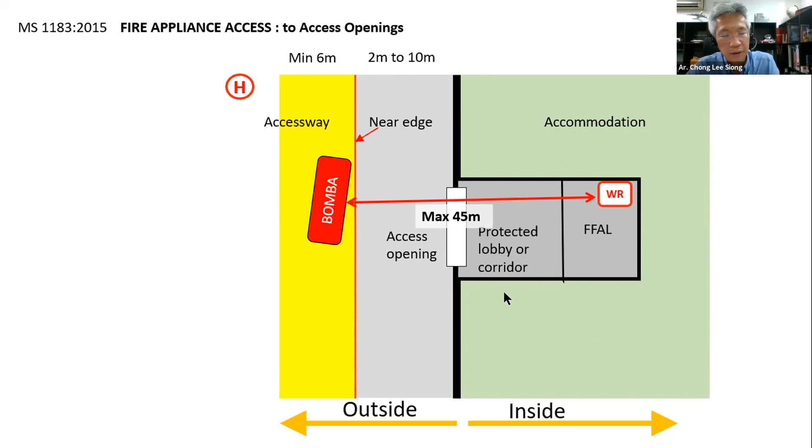Breeching inlet BI, hydrants, maximum distance 30 meters, near edge no closer than 2 meters, no more than 10 meters—2 to 10—and this will be the inside of the building, the accommodation. You are to allow the bomba vehicles to get to a maximum of 18 meters from a breeching inlet. Where you have a protected lobby, you have a FFAL, that will be the relationship.

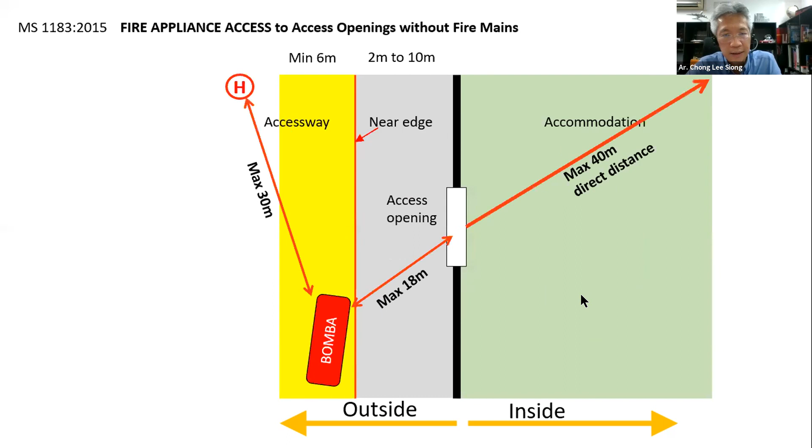These are the maximum distances allowed in terms of how we design for the access way, the near edge, and so on. If you have a very big building where there are no risers, like a giant warehouse, these are the prescriptions in the Malaysian standards that you have to comply with—you just have to check. These are fairly self-explanatory. So again, in closing, I'll just say: are we still designing to minimum prescriptions?

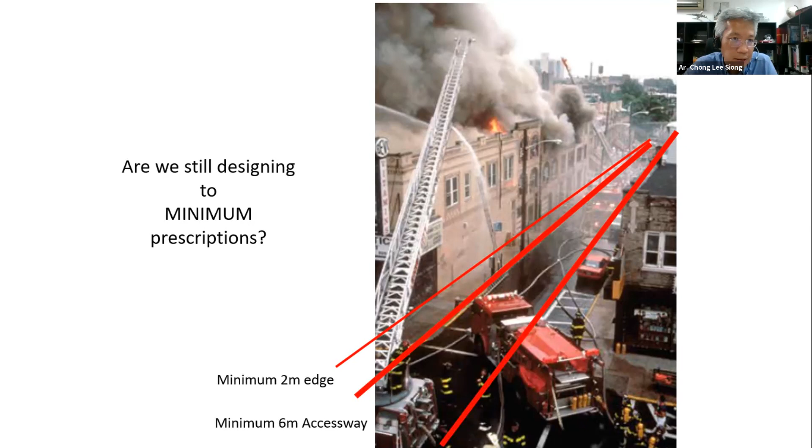I have to say we shouldn't be designing just to minimum prescriptions. We should fully understand what is the building that we have designed, what are the fire risks, and plan and design all the appropriate fire safety devices and installations for it to work to comply with our design.

All right, okay, thank you. Husam, I'll send it back to you. Thanks, thank you very much. That's really, these questions keep coming in, and I hate to interrupt the presentation because I don't want to interrupt the flow of what is being presented. I think we have about 14 minutes, so that's not so much.

Now we go to the Q&A. The first one is from Hui Fang: for the 2 plus 6 meter access way requirements, can the building facade protrude out by 2 meters after the clearance of 4.5 meters from the road level?